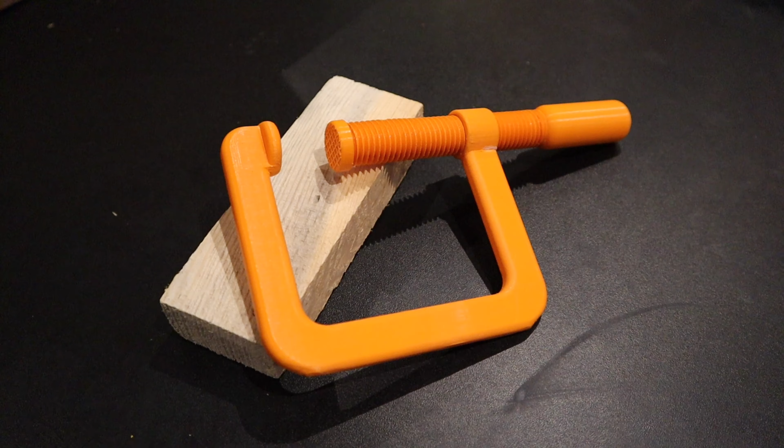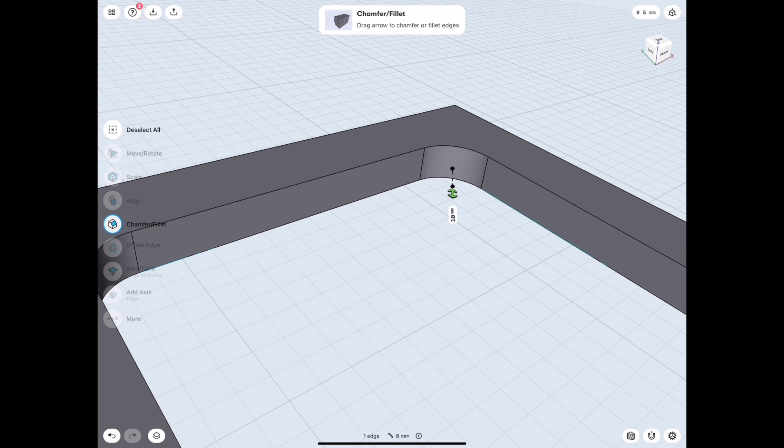Today I'm going to be making a little tool that I'll be using quite regularly in a lot of my work. You could go out and buy these, but the stuff I'll be using them for is going to get a lot of paint and glue on them, and I don't want to waste money since they can be expensive to buy. I wanted to make my own so that if they get paint or glue on them, or get broken, it won't cost me much, and it'll be easy to reprint a part or the whole thing. So today I'm making a G-clamp.

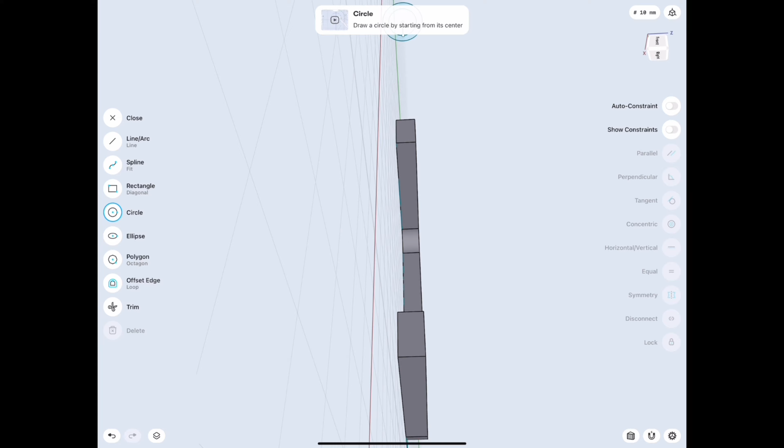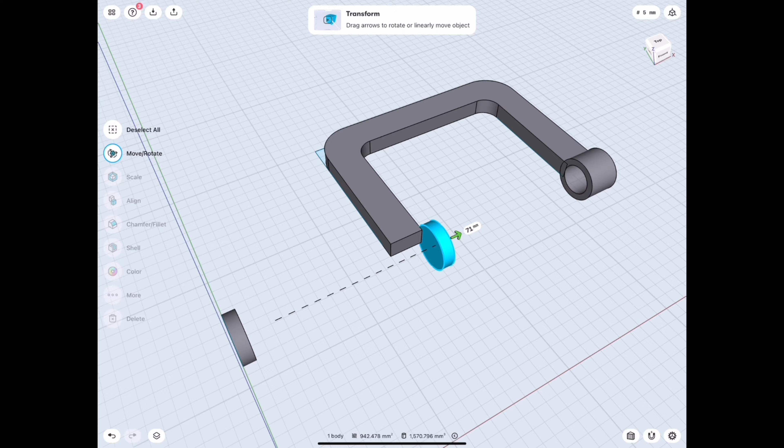I've got a few of these that I already own, and that's what I based this design off of. I tried to make it as simple as possible, because when you're making something like this, it's quite difficult to get screw threads and things like that accurate and working. It took a bit of planning, and I had to do a lot of measurements on one of the G-clamps I owned, but I finally got there with the design.

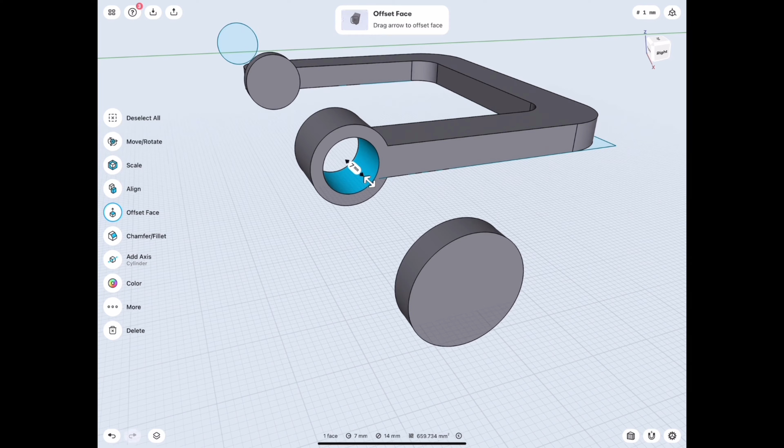As you can see from the drawing, this is your general G-clamp. You've got the frame, the little end plate on the left hand side which is the supporting part, and here you've got the ring part, which is the screw thread that goes through and tightens up, holding whatever you want it to hold.

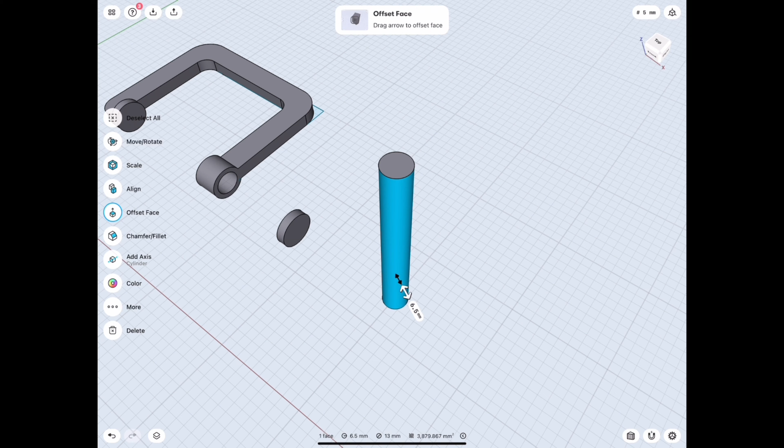I'll probably be using this mainly for spray painting, for holding things that are a bit fiddly, or just hanging them up in general, because they're lightweight and easy to use. Since they're made of plastic, if they tighten down on anything, they won't cause much damage.

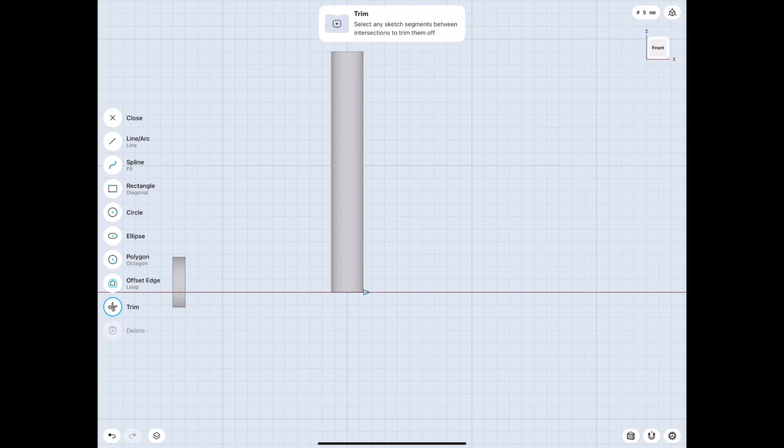Here you can see I'm working on a screw thread. This is how I make screw threads - I'm not sure if there's an easier way of doing it, but this is how I taught myself. I think I saw somebody else doing it, and that's where I got this method from. But if there's an easier way, drop it in the comments and let me know. I use Shapr3D as my main drawing program.

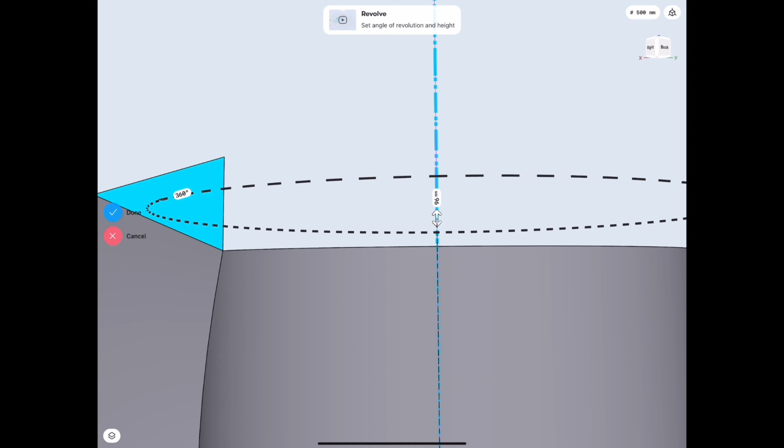I normally make a triangle, expand it all the way around, and once I've got that lined up at the top, I'll change the angle, and keep changing this over and over again until I get that screw thread nice and tight within the dimensions I want. This seems to work for me, to be honest.

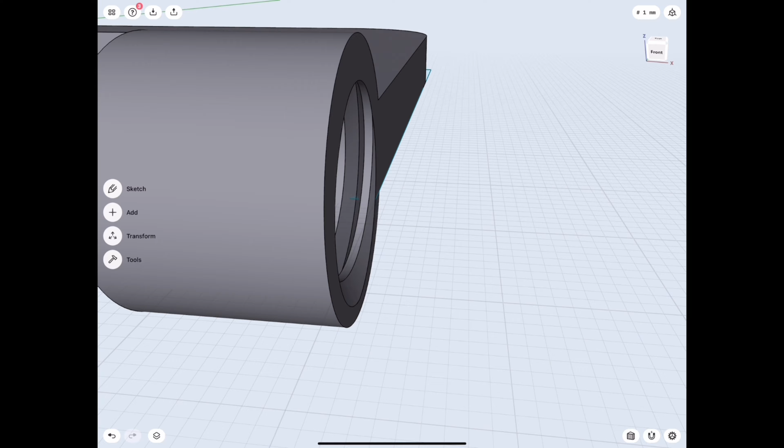I've made a few different screw threads using nuts and bolts and things like that, and it's worked for me. The way I made the screw thread on the inside was I copied the screw thread I originally made, dragged it into place, and took that away from the G-clamp frame, which left me with that internal screw. There's probably another way, but for me this is the only way I know right now, and it works. So if it's not broken, don't fix it, basically.

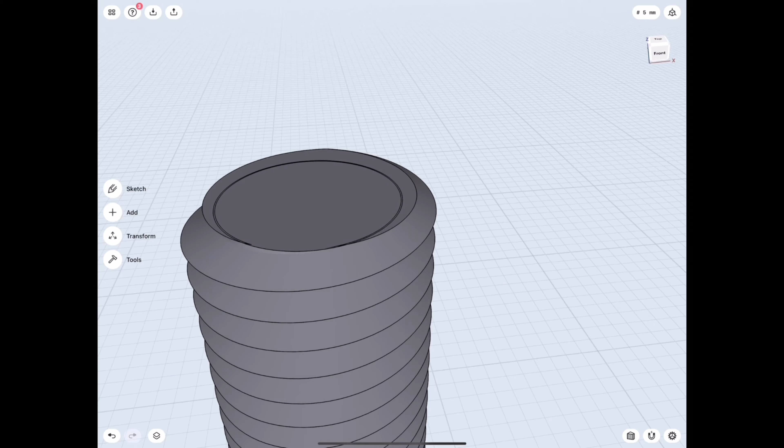You can see I've made this all one single piece, this screw thread, and what I needed to make was this little butt cap. This is the bit that's going to go into the end of the screw thread, and that's going to form my other plate that will hold stuff in place.

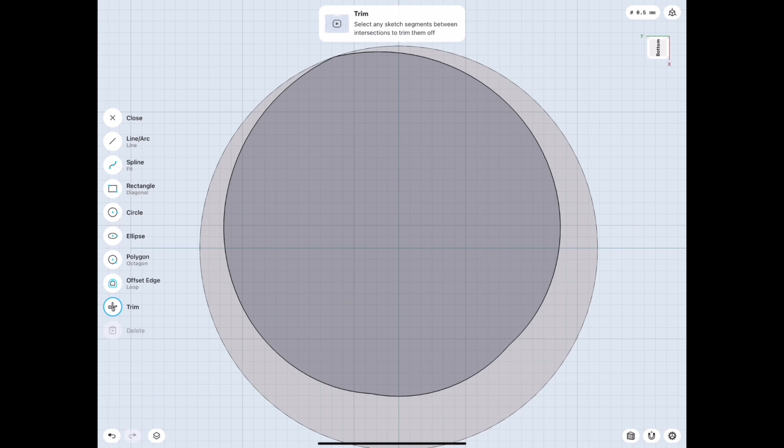I wanted to make this spinning, so that when I'm clamping down, this little piece on the end that goes on the screw thread doesn't scratch or mark what I'm using it to hold. I made that area quite big on the inside so it would pivot through, and on the other end I made another little hole, like this little square, so that when I put the handle in, it gives the handle something to hold onto, giving it extra strength when tightening up, since I'll be putting quite a lot of force through that screw thread.

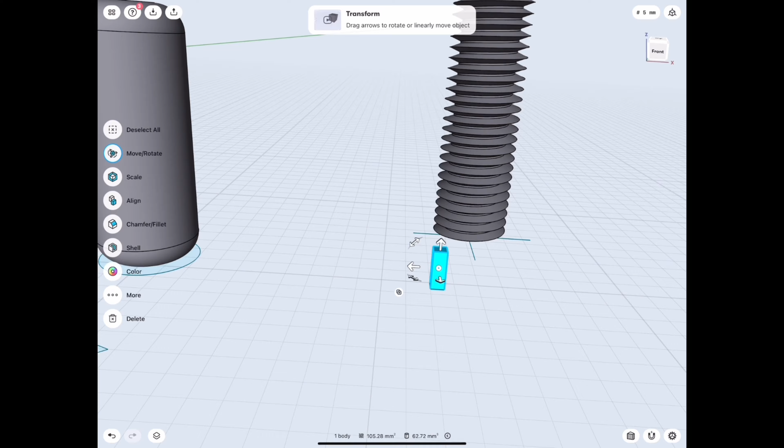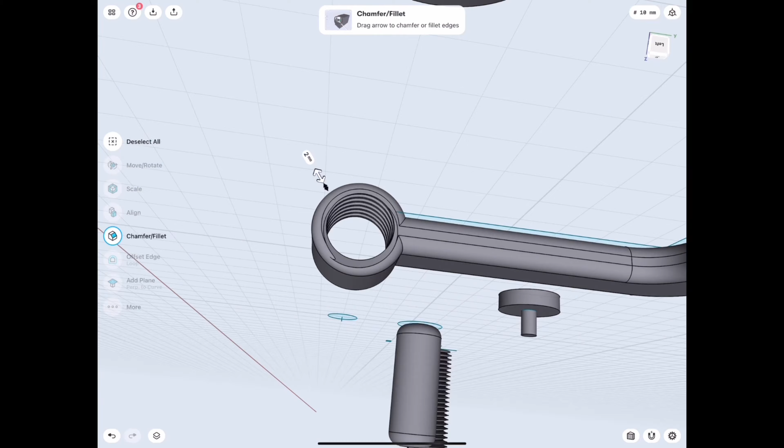So this is the little square pin here that's going to be going inside, and I always make these slightly smaller than the hole, just because if you make them exactly the same size where the printer prints, it sort of expands the plastic slightly bigger than what you've actually made your dimensions as. So I always make it a little bit smaller than the actual hole, just to make sure it's a nice snug fit.

But not too tight that you have to force it in and maybe break it. So now I'm just rounding off all the edges just to make everything nice and neat, just so it feels nice in the hand and looks a little bit nicer. And this is how it ended up being. Really happy the way it's turned out. I like the design.

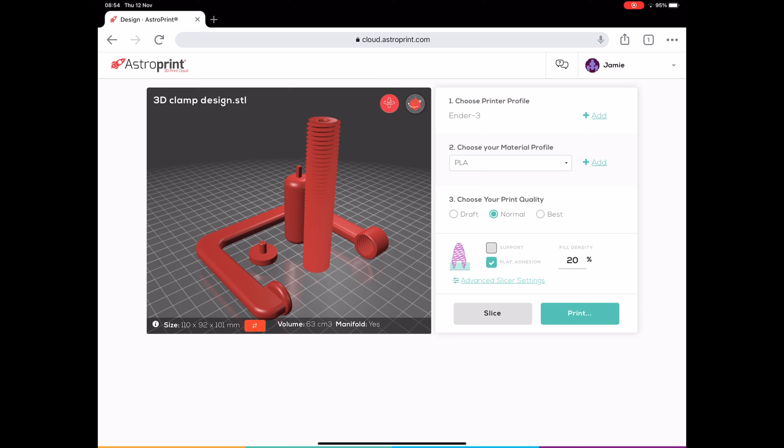So I've taken it over to my slicer, which is AstroPrint, and you can see this is how I originally wanted to print it, but I did come into some issues with it, which I'll show you shortly. But the general settings I set are the quality, which I don't really mess about with.

The infill I've left at 20%. For my PLA, I like to print a little bit hotter just because I feel like I get better adhesion between the layers, so I print at 235, and I like my printer bed to be at about 65 degrees just to make sure it doesn't come off the bed.

Now I do put a support on this just because there are some raised areas I do need it to be supported, otherwise it just won't print basically. I set the density on this a little bit higher just because I wanted to try and get a nicer finish on the actual part of the clamp that it's going to be supported.

And here you can see these are all the general settings. I don't mess about with any of them, I just keep all that exactly as it is. And I'm not going to put a build plate adhesion on this either, just because there's quite enough surface area to hold it down. So once it's sliced, this is what it's going to look like.

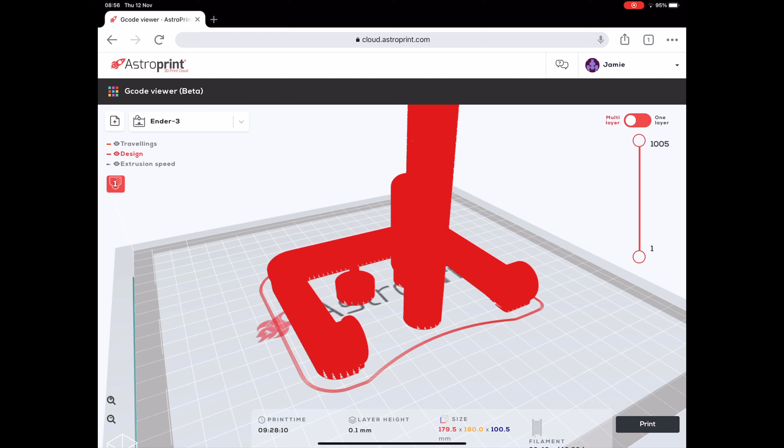Now, as I said, I have changed this slightly, as you'll see from the printing. I originally sliced this all together, and you can see where I've put supports under the clamp. For some reason it put supports underneath the spiral part, the handle, and the little end plate that goes on the spiral. I didn't really want that there, just because I felt like it wasn't needed.

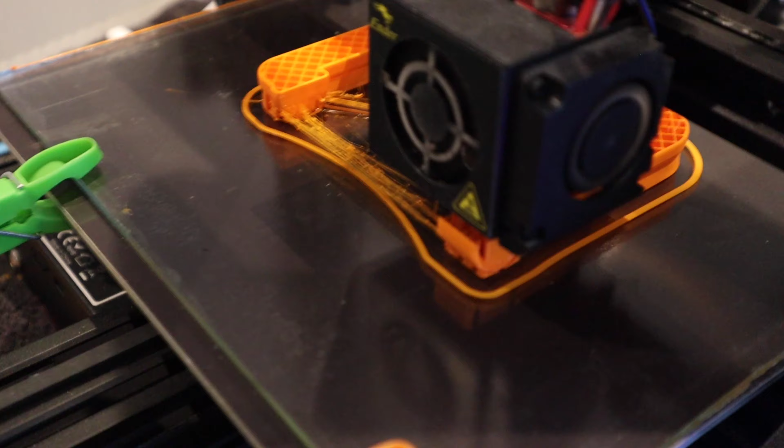It also put loads of supports on that spiral bit. If you look at the spiral, you can't see the individual teeth because it put supports on all of that as well. So I ended up taking those three bits out, and as you can see, I'm just printing the actual G-clamp bit here separately. I then printed the handle, the spiral, and the little plate that goes on the spiral all together as well, and they all came out fine. I didn't need to put a support on them.

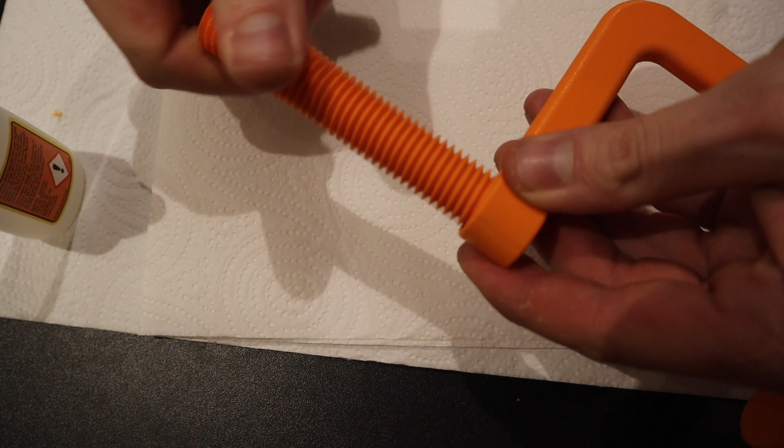So this took quite a while to print overall, because I did have to do it individually and start it all, but to be honest, it went very quick as I did it overnight. So by the time I woke up in the morning, it was done.

So after clean up, here you can see I've put the screw thread in, and it fits absolutely perfectly. It was a little bit stiff to begin with, but after I put it through a couple of times, it loosened itself up. So this is the handle with the little square pin that I made, and I'm just going to glue that into the end there with some Gorilla Glue.

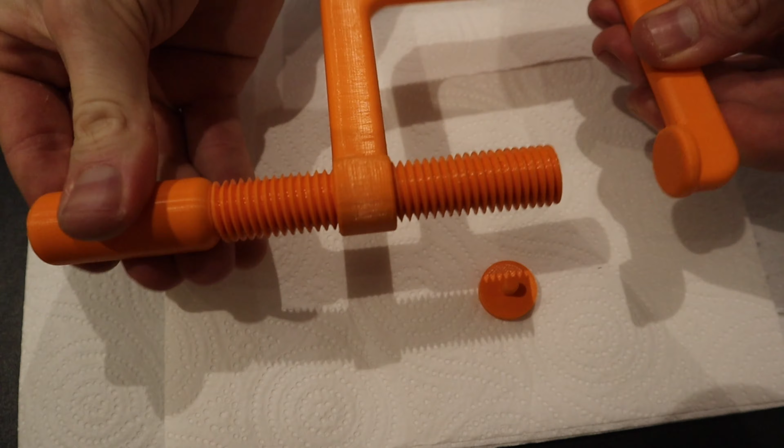I find Gorilla Glue works really well with this stuff. It doesn't melt it like some adhesives can, and you can see here I can turn it absolutely perfectly and it's not breaking. Now this is the little cap that goes in the end.

You can see where the end there had a little bit of trouble printing, but I left that grip there because I'm not too worried about it. And this is it actually in place. You can see it's working absolutely spot on. It clamps the wood brilliantly.

I probably wouldn't be using things of this size in it just because that's a little bit too heavy, but it was just there to show you what it can actually do, and it can hold a decent size amount of wood. So yeah, that's the build.